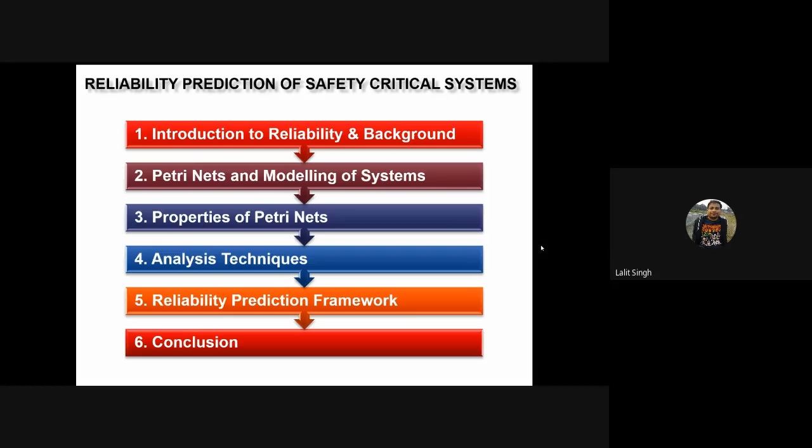And we'll be taking a real case study, and we'll be trying to demonstrate or illustrate our approach on this real case study so that the participants can have a real feel of how it can be used in real practice, and then we can conclude the session.

So this is all I have talked about. So anyway, if you see mathematically the definition of reliability, let us assume X is a random variable which represents the time to failure of a component. Then, because time to failure means it should at least work for this period of time, it should not fail within this period of time.

So the reliability of the component at time T, because as I said, reliability is a function of time, is given by the probability that X must always be greater than T. This will represent the reliability, because X is the random variable which is basically representing the time to failure. So before this, it should not fail. So X must be greater than T, if I'm talking about reliability as a function of time T.

Then from the mathematical knowledge, we can write it as equal to 1 minus P(X is less than or equal to T). X less than or equal to T represents the probability of failure before the specified time T, meaning it is a failure probability. So we can equate it to 1 minus failure probability, which is also a function of time. Now failure probability is nothing but what we can name as unreliability also. So if you see, from the total probability law, the sum of reliability and unreliability will always be equal to 1, because both are representing probabilities.

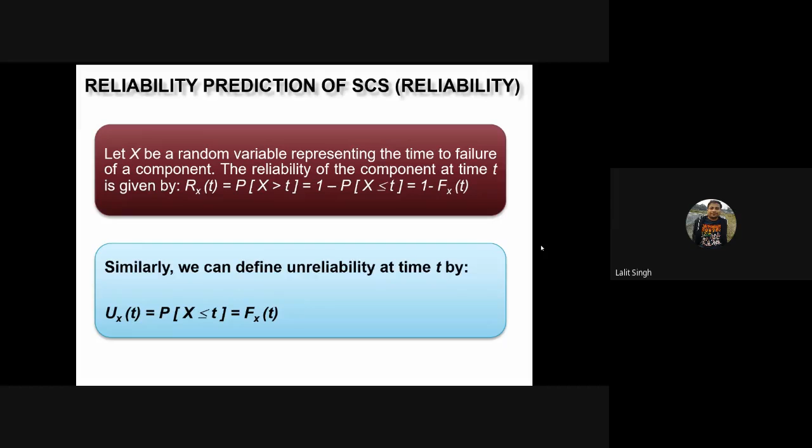Now let us have a look at the traditional methods which are being used for reliability prediction of safety critical systems. One method is known as the reliability block diagram. In reliability block diagram, the concept is that any system is composed of several components, and those components can be arranged in series and parallel combination. So this logical structure of the system, constituting the layout of the components, is known as the reliability block diagram. And the layout of the components definitely affects the overall reliability of the system.

For example, suppose two components C1 and C2 are arranged in series, and suppose one system contains only these two components. Then the reliability of the overall system can be computed by the series formula of reliability, that is R1 into R2, if R1 and R2 are the reliabilities of components C1 and C2 respectively.

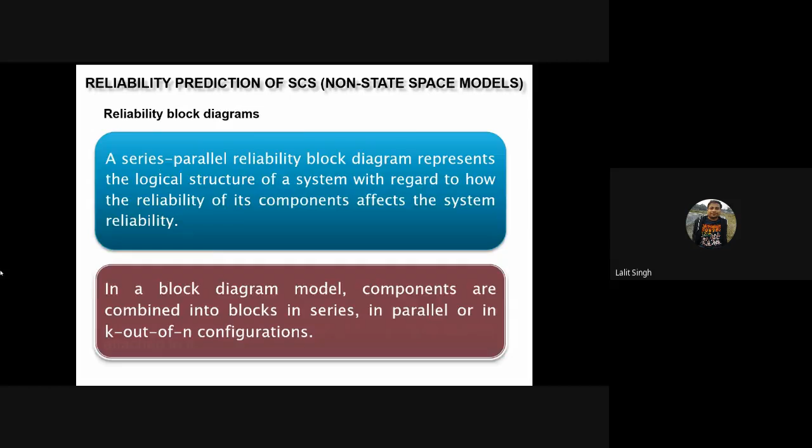And the reliability of the overall system will definitely be the function of the reliabilities of its constituent components.

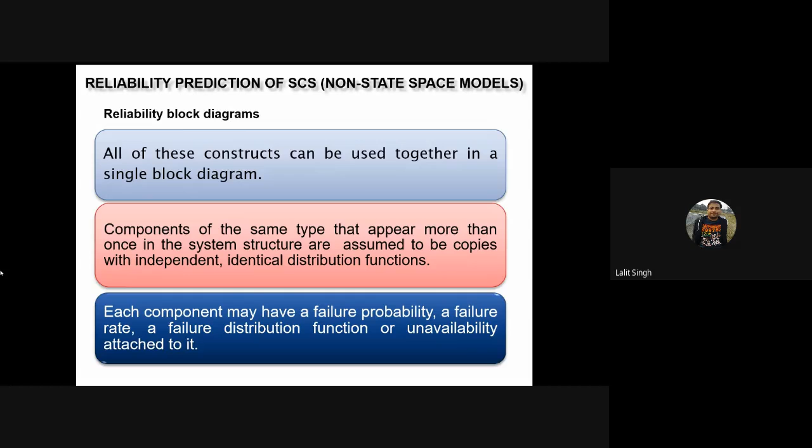Now there is a second traditional method that is being used, known as the reliability graph. The reliability graph is very much similar to the reliability block diagram. Only the notation or the basic building blocks are different, and it consists of a set of nodes and edges. It basically contains directed edges, and the nodes represent the link between two components. It represents the connectors between two components, and the arc basically represents the components in the system.

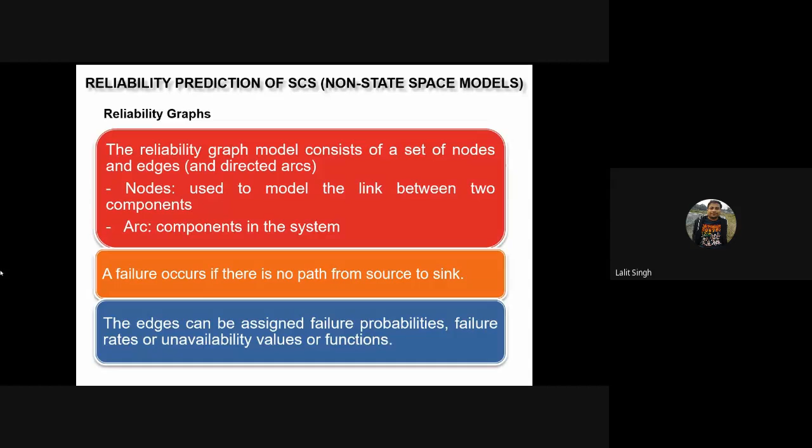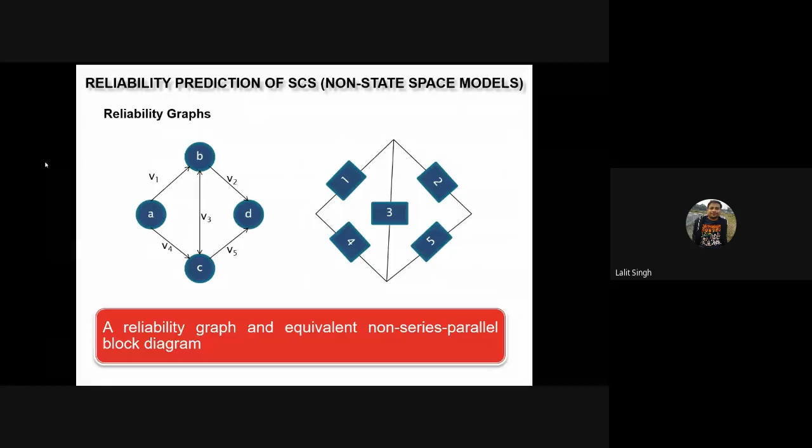Now the next very prominent method of reliability is known as the fault tree method, and it is basically a deductive technique. Deductive in the sense that we start with the observation and try to deduce the cause of that observation.

For example, if I say my laptop is not working, then the cause could probably be the power button has failed, the power supply is failing, or the hardware is failing. Now we have to deduce further.

For example, if I say my power supply is failing, the reason could be loose connections, the wire could have broken, power is not coming at all, or there is a loose connection from the socket side. So we are trying to deduce further and further.

Or if I say hardware has failed, either the hard disk is not working or some ICs are not working. So we can keep on deducing and try to find out the basic cause, and we can assign the probability of that basic cause to solve the top level probability.

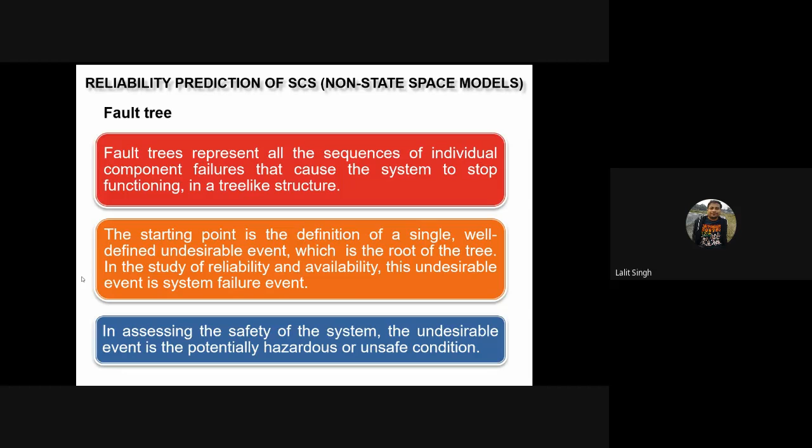Now, these models that we have seen so far are the traditional models, and are not able to capture the dynamics of the system. Because reliability will also depend on the current scenarios or the dynamics of the system. So if there should be some modeling technique where we can embed these dynamics, or which will be able to capture these dynamics, then we will be able to give more accurate estimates of the reliability.

So for that, people started devising different types of methods for reliability prediction, and those methods are known as state space methods or state space models. The concept was, let us decompose the system into various states that can be confronted throughout its operational time.

For example, if you consider a human, it can have the states running, eating, sleeping, talking, walking. These are the various states.

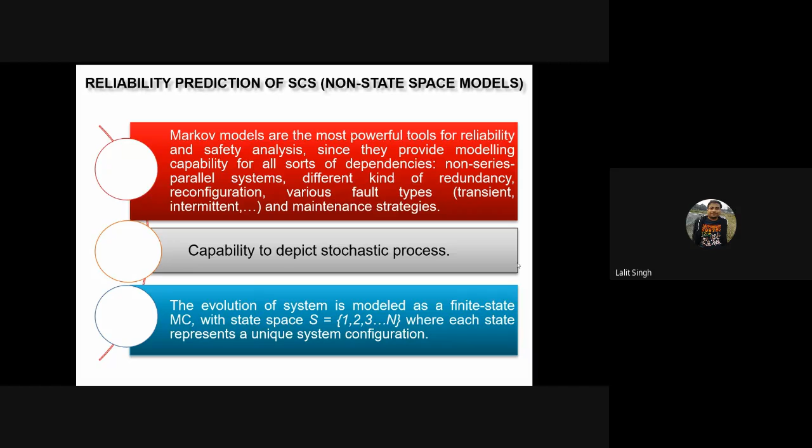Mathematically, if there is a system which contains only two states i and j, let qij be the transition rate from state i to j, then we can define the transition rate. Transition rate means the number of times per unit time it is transiting from one state to another. So if you sum up all the transition rates from one state to all other states, it will always be 0.

So qii will definitely be minus the summation of qij, where j can range from 1 to n, but should not equal i. Then we can define a transition rate matrix in which we write all the states in rows and columns, and fill in that matrix by computing the transition rate from one state to another. This matrix is also known as the generator matrix, or transition matrix.

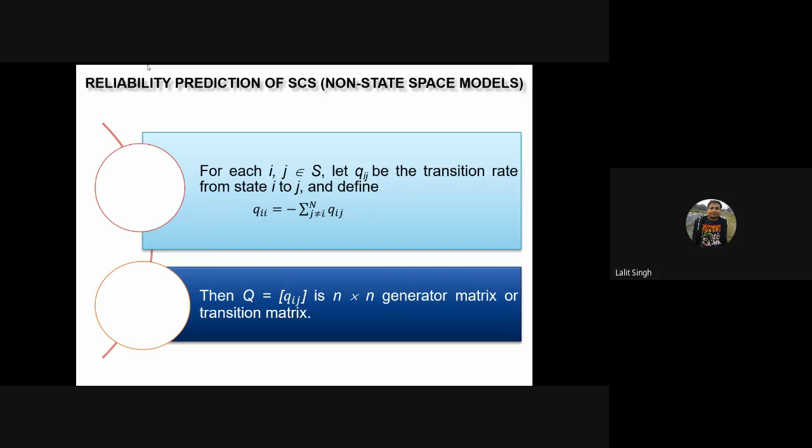Now coming to the next modeling technique, the Petri net. This concept was introduced by C.A. Petri, a German PhD scholar, in the 1960s. He introduced this concept to solve various challenging industrial problems and to model the stochastic behavior of processes. As I said, it is a very good graphical tool as well as a mathematical tool.

There are a lot of benefits that can be drawn from the graphical representation. For example, suppose I'm a very big businessman and I have a business of ventilator development. But I outsource the development - I only study the market and analyze it, and accordingly give the specifications to the development agency.

What is the benefit that can be drawn from this Petri net model? The development agency can model all the requirements in a very pictorial format, and it can be illustrated to me, where in the requirement phase itself I can point out what requirements have been missed and what are the ambiguous requirements, and a lot of discussions can be taken up during that period of time.

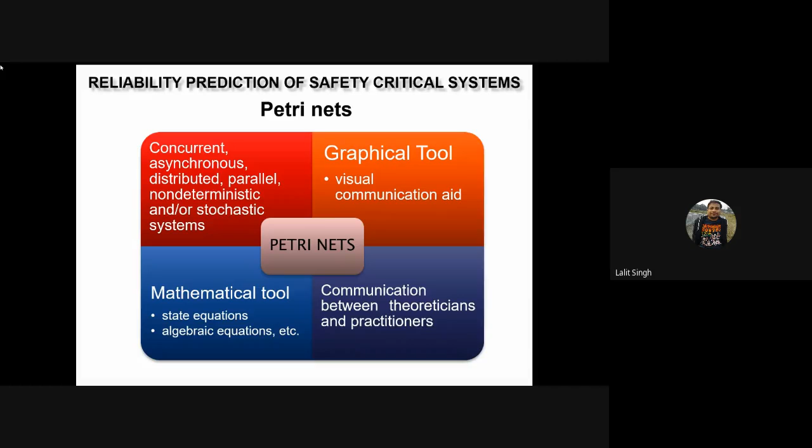Looking back into the history of Petri nets and its important milestones: in 1962, C.A. Petri introduced this concept in his PhD dissertation, which was later recognized as having the potential to model most critical aspects of a system.

With this objective, MIT USA conducted a conference on concurrent systems and parallel computation in 1970 to discuss whether this modeling technique could be used for concurrent systems or parallel computation. The outcome and conclusions were very beneficial, and they thought of enhancing the modeling technique further.

With this objective, they decided to conduct the next conference in 1975 on Petri nets and related methods.

Then industries also started using it. Looking into industrial demand, Germany started a course on general net theory of processes and systems in 1979, after which people began discussing what kinds of applications could be modeled.

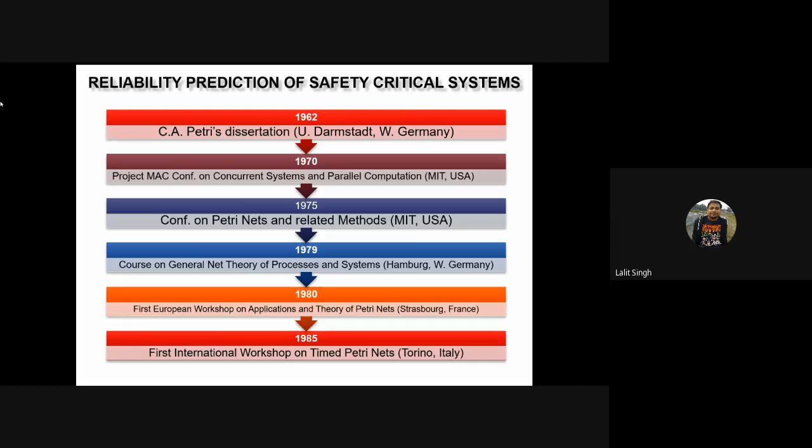Now, looking at Petri net applications, it has the potential to model almost all kinds of systems, whether concurrent systems, control systems, safety-critical systems, fault-tolerant systems, hardware systems, or software systems.

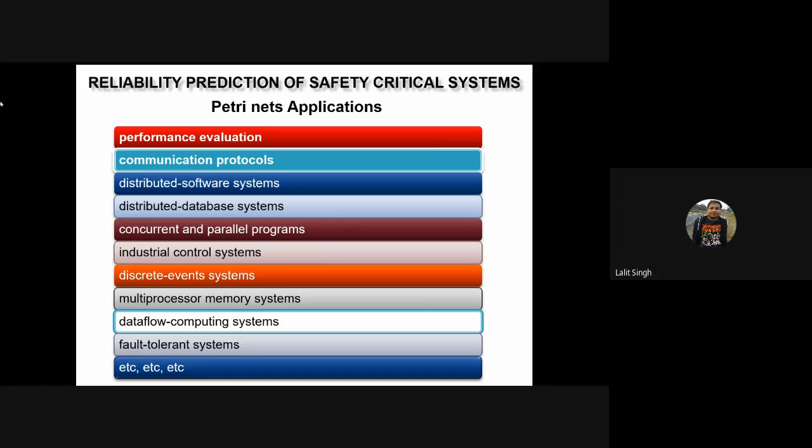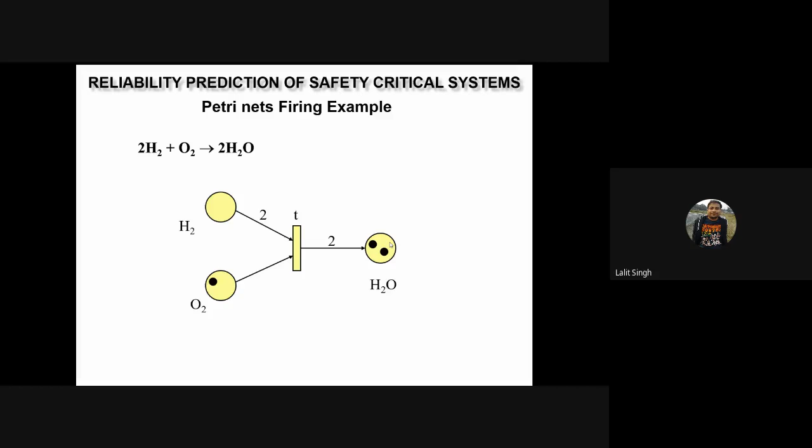So that was the basic working mechanism of this Petri net.

And always the current state will depend on the previous state and not on more previous states. So suppose there is a sequence of random variables x1, x2 up to xn with the Markov property. What does the Markov property say? That the probability of my system being in state n plus 1, if it is x, will only depend on the previous state, not on more previous states. So it can be written as x(n+1) equals x.

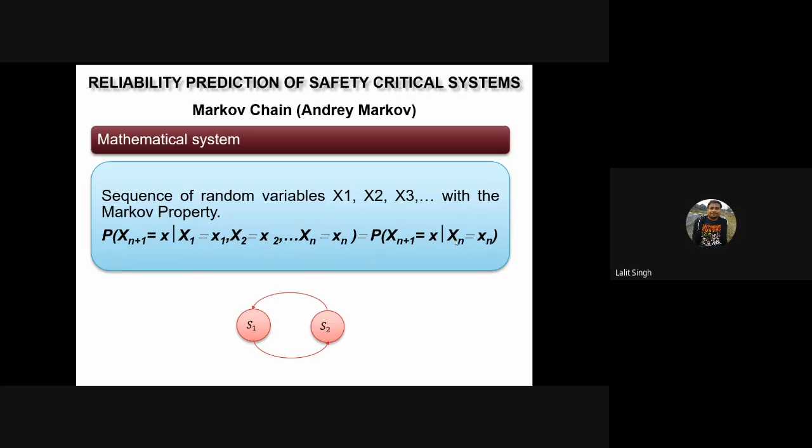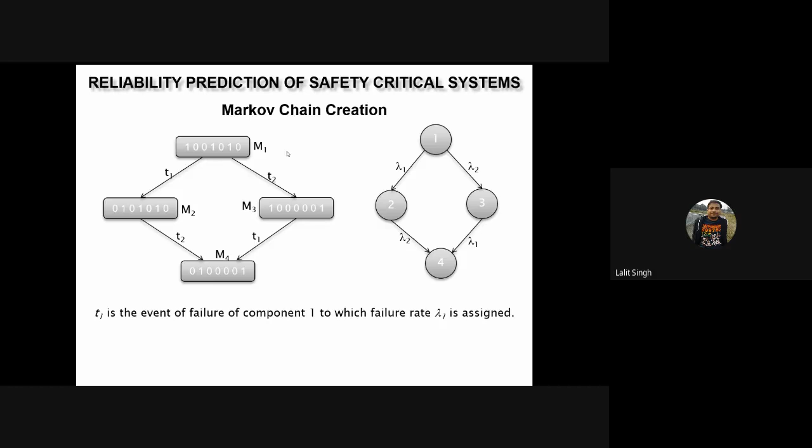Now, let us discuss our reliability prediction framework. We have already discussed the background knowledge or the base knowledge that is required to execute our framework.

Our framework basically contains 3 stages. One is the Petri net model creation. We have to create the Petri net, which we have already seen while discussing a small example of a chemical reaction. We will see when we take a real case study and try to illustrate this framework's activities.

Then the Petri net model can be converted into the Markov chain. We have seen how we can convert it by drawing the reachability graph, and that reachability graph can be easily converted into the Markov chain. Then in the third phase, we can compute the reliability by solving the Markov chain.

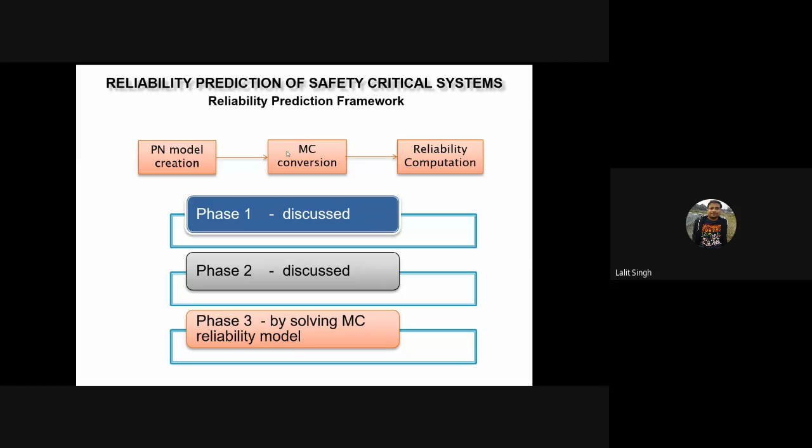Now, before actually starting with the framework or the case study, let us understand some important concepts. Let us assume pi_i is the probability that a component is in state i at time t, where i could be failure states or behavioral states.

As t goes to infinity, these probabilities converge to the stationary distribution. Now this is a very important statement.

For example, consider a glass, and that glass is filling with water, and suppose the water is zigzagging. So this is the initial state, and after some amount of time the water will completely settle.

Now consider a similar case, but in place of a glass, take a very big container, for example the size of a room. If you fill that container with water, you will find there will be water waves zigzagging, and it will take a much longer period of time to settle down completely, compared to the time taken by the water in the glass to settle.

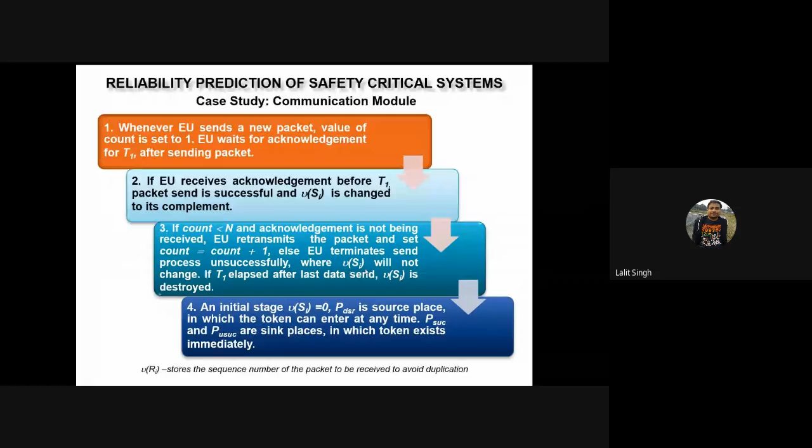So let us try to now predict the reliability of this communication module. The first phase was involved with Petri net creation. This is the Petri net of the algorithm that we have discussed, so let us understand this Petri net model.

This place PSRDY represents that the embedded unit is ready to send the packet, and with this the semaphore variable is equal to 0. So if a token exists in this place, it means it is ready to send the packet, my system is ready. But to send the packet, it has to get the request from the display unit, so it has to receive the demand which will be coming from the display unit. This PDSR represents that the embedded unit gets the request from the display unit, and then it is going to this transition TS0, which represents that the embedded unit sends the packet with sequence number 0, and it resets the retry count k equal to 1 by firing this transition.

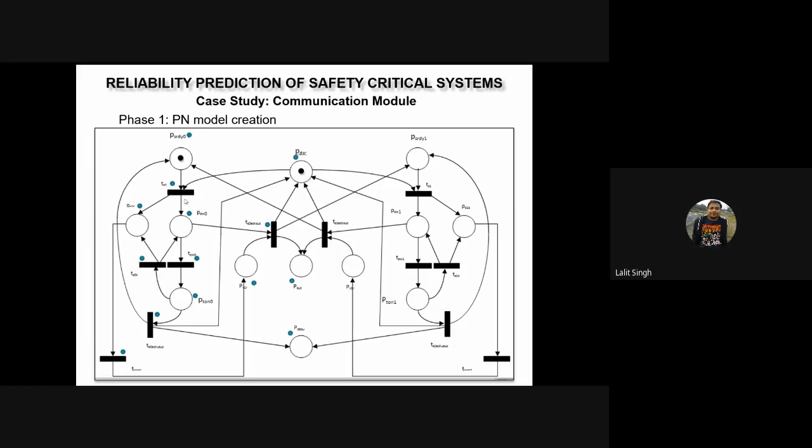So in the earlier state these are the tokens, and then it has been deposited here. In this way we can generate all the markings, and the markings can be tangible or vanishing in nature. If I have associated some delay, it is tangible in nature, otherwise it is vanishing in nature.

And then this is the reachability graph which we have shown in pictorial format, and this can equivalently be transformed into a Markov chain. These markings represent the states. A noticeable fact is that M3 and M8 are unsuccessful states, because here the packet has not been reached.

Next, we can create the generator matrix - the transition rate matrix - in which we mention all the states in rows and columns. We can see, from this figure, from M0 there is a transition to M1. From M1 there are two transitions, one to M4 and one to M2.

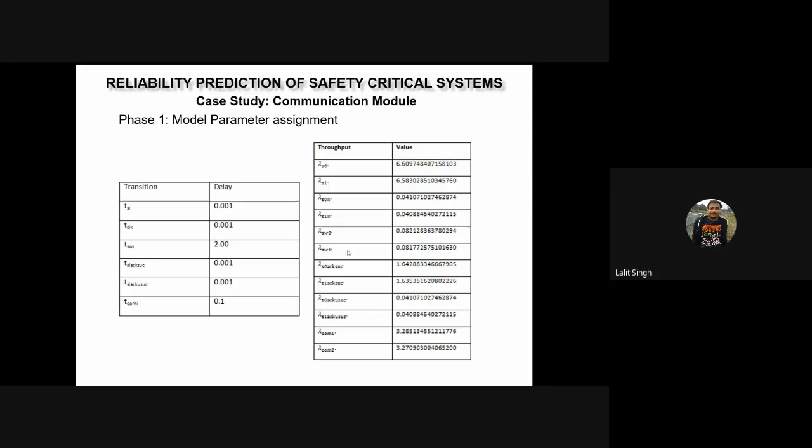So we can calculate the transition rate matrix, and then find out the transition probability matrix using a simple formula. If I want to find the transition probability from state I to J, it can be written as the transition rate from state I to J, normalized by summing up all the transitions from that state. If I equals J, it is 0. Accordingly, we can create the transition probability matrix - this is the transition probability matrix.

Now we have to use the two important equations that we have already seen. Let me go back to that slide. The two important equations were: one, the sum of the total probabilities is equal to 1, meaning m0 plus up to m8 equals 1; and the second equation, which we are using like this.

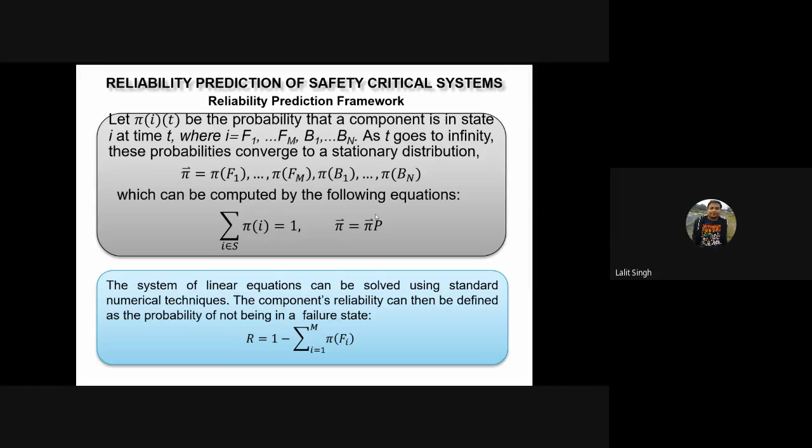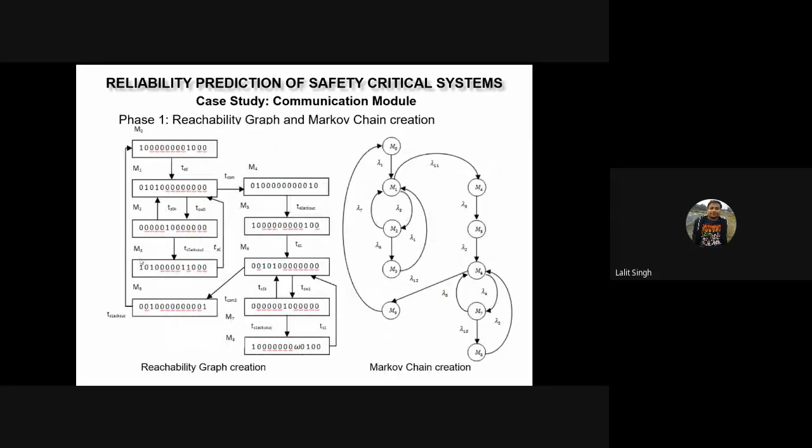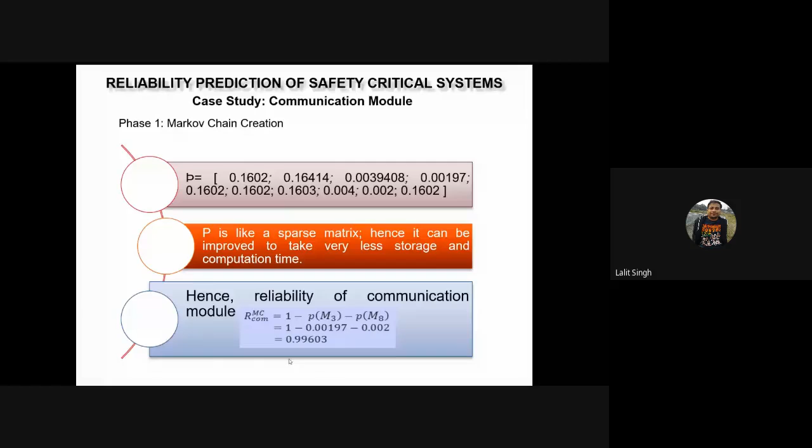So this is equal to the same states and to the transition probability. Now we can solve these two equations to find the state probabilities from M0 to M8. We have seen that M3 and M8 are the unsuccessful states, so we can add the values of M3 and M8 and subtract it from 1. This gives the reliability of the overall communication module, which is 0.99603, which is subsequently very good. So that's all I wanted to conclude.

So here we can see how we can demonstrate or quantify the reliability of the overall system. And if your system is large, we can probably segregate it into various components, and then we can solve the reliability.